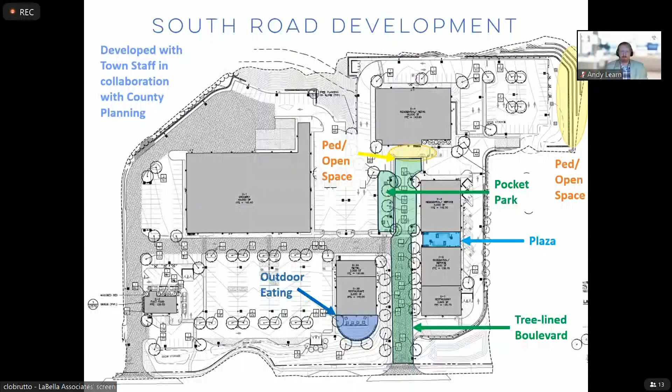Okay, so this just goes through these details. This is the plaza here between these two buildings. There's bike parking, light poles, benches, trash cans, stamped concrete pavers, and planter boxes.

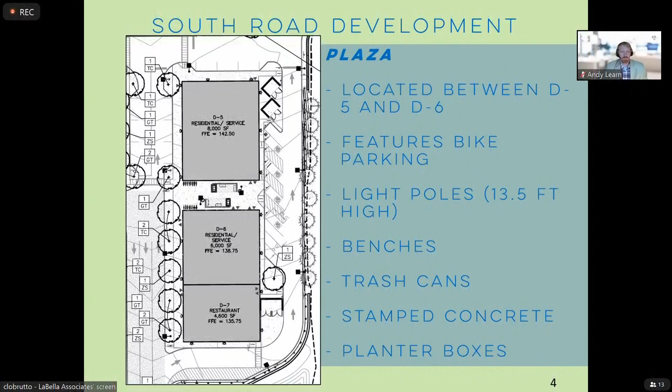Here we have this southeast open area I was talking about. So this is the design as it stands today, but in the future, as part of our upcoming submission, these walls will be reduced to 2-foot seating walls.

I just note that there's snow storage proposed a little bit further north. We'll move these picnic tables that you see so there's not conflict there. And this is located south of D4, which has residences.

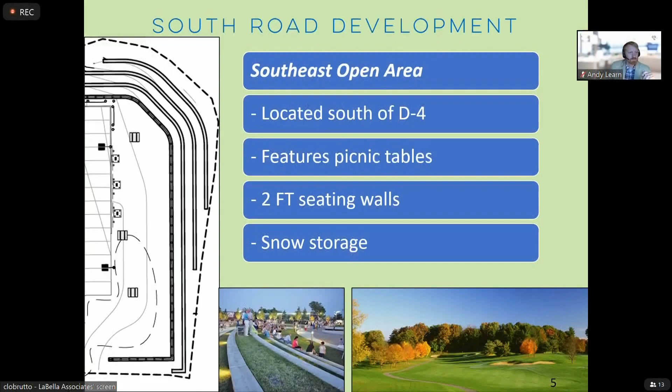Again, we have the outdoor eating area, which is west of D3. This is right off of Route 9, by the tree-lined boulevard. As you enter, it's got tables.

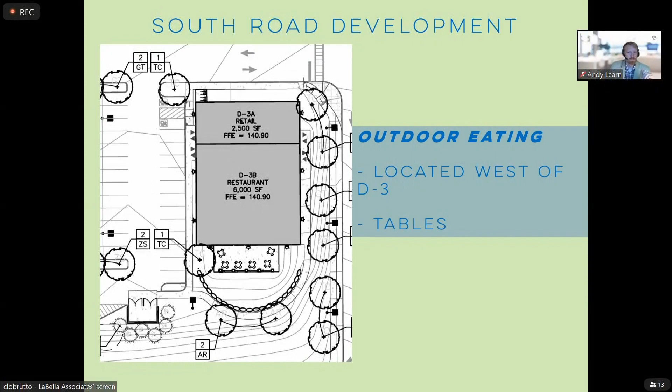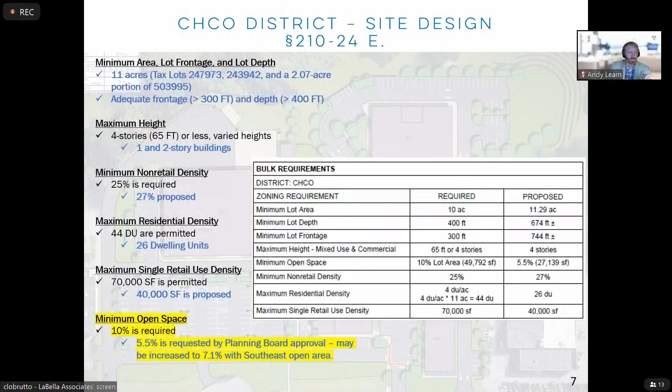One of the things we need to clarify is whether the board has the power to waive the 10% requirement so we can come in with approximately 7.1% once we add on this open area at the southeast corner, or if we actually need an area variance from the Zoning Board of Appeals. That's one thing we'd like confirmation on.

I just thought I'd run through some of the comments we've heard on our application most recently. Lots of questions about the access lanes, and we're joined by our traffic engineer, Phil Greeley from Colliers Engineering, today for specific questions on that. In general, we're still undergoing coordination with DOT, and they will weigh in and direct us.

Pedestrian crosswalk on Route 9, again, that's something DOT has full voice on. We're pending that decision. Snow storage in the Route 9 right-of-way, same story. Possible traffic signal pole relocation, depending on whether there should be 3 access lanes or not.

The refuse enclosure on Route 9, within the site close to Route 9, we know was a question early on. We've presented as part of our recent submission evergreen landscaping and a masonry enclosure. This was discussed at great length amongst town staff, our staff, and county staff, and we've come to the place where we think this is the only place it can work.

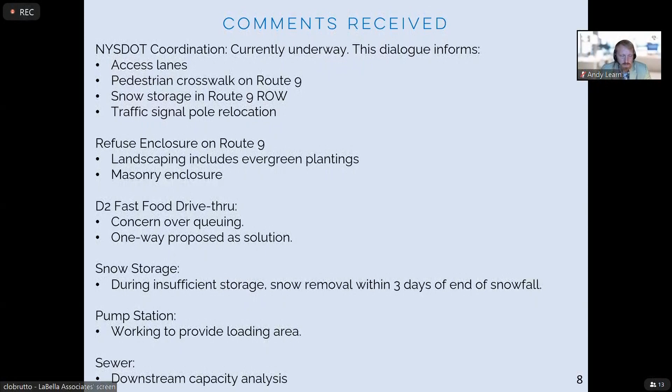We're working to provide a loading area for the pump station. We understand the concerns there, and we're confident we can make that work, perhaps not in exactly the same location, but in a suitable one. And for the sewer, we are getting to work on the downstream capacity analysis. So that's all I have for now.

Okay, thank you for the overview. Quite a few changes have come along. Kristen? Thank you to the applicant for outlining many of the things I was going to get into.

The application is on this evening for a public hearing, SEQRA review for type 1 action, lot line revision review, site plan review, and architectural review. There were a couple of notes related to SEQRA in terms of the blasting management plan.

The applicant has included embedded notes within the plan set. I kept that language there because it can be extensive, and I don't want it to catch the applicant off guard. Although it's acknowledged, I want the applicant to be aware that this is its own lift in terms of workload and will require additional review by town staff, not necessarily planning, but building department, so you may want to start that coordination and consultation.

Also, as was mentioned, DOT consultation is ongoing. That consultation will also include continued conversations with our town traffic consultant, JMC, and planning staff. There are also standard notes for lot line revision review that are still included, as was mentioned, as part of the application process.

There were many comments when we first received this submission and application. We think that the applicant has been responsive. We've been working with the county and the applicant over the last many months to get to the submission as it is proposed currently. That said, we do still have a number of comments to which the applicant has addressed or identified, acknowledged this evening already.

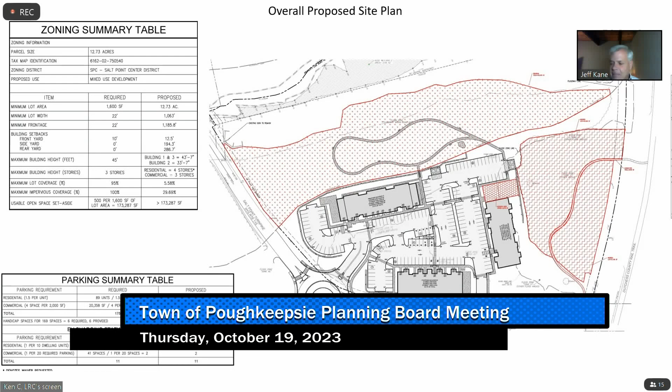But that'll be corrected. The other thing that was particularly called out, and maybe we can get some feedback from the board, is the location of the EV charging. We chose this area in the center of the site, not the prime spots right in front of any one particular building, but tried to make them accessible to all users. I had a long discussion with county planning about that at our meeting, and they came around and understood why we chose those spaces. We're happy to relocate them if it makes sense to the board, but we'd like to spend a couple of minutes talking about where the board thinks those are appropriate if not in this particular location.

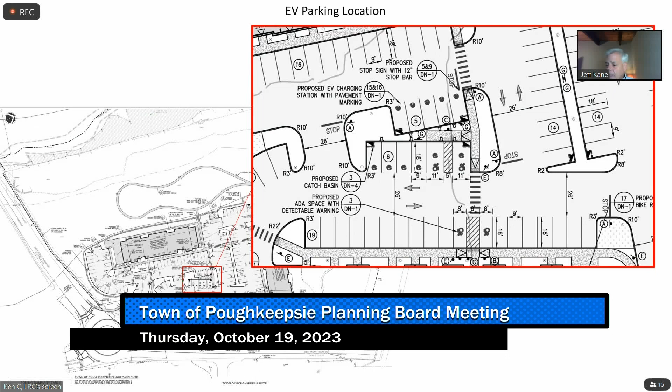All right, I think those are the highlights we wanted to raise and talk about, but we're looking forward to your additional comments as we move forward on this. Great, thanks, Jeff.

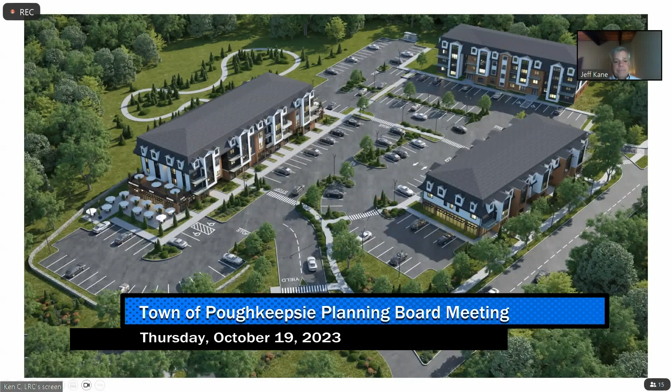Let's go to Eric. This will be the first time this application is up for a public hearing. It was revised back in August of 2022 and circulated for the planning board lead agency, and there's been no objection. So the board is now the lead agency.

I'd agree with Jeff, there's been a lot of progress on many of the elements discussed with staff and with the planning board. He correctly identified some areas that need additional work, but it's a welcome return to discuss where to go from here. As far as the uses, that was one of the central issues we looked at, and I'm glad to hear that'll be clarified moving forward.

That way the consultants can look at it and the board can discuss it further next time. Similarly with EV chargers, the issue was not whether the central location was good or not, but whether it would be a useful discussion if the board was interested in other locations at the site as well, or if that's sufficient where it is.

Another point, since the staff review went to the board, it occurred to me that something got discussed offline but not in public. Under code 2-10-93, open space preservation provides for all applications with a residential component to have a dedication of land for public parkland or a fee in lieu of. I don't recall that we've had that public discussion yet. There was a lot of discussion about private amenities for residents, but not about a dedication to the town of Poughkeepsie for public parkland or a fee.

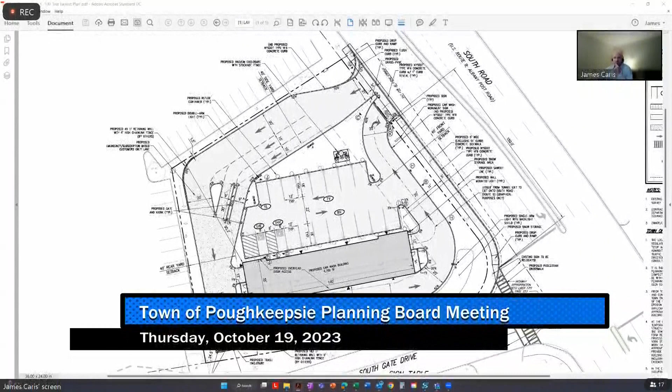The application is still technically on for a public hearing, even though this evening was just a presentation, not a full submission. So we are recommending that the board open the public hearing, hear any comment, adjourn the public hearing, and defer action with comments. As noted, there were several meetings between the applicant and staff. We think this is a step in the right direction, understanding there is still review to be done. Once we've received the traffic study, there may be additional meetings or analysis required, but I know the board shares some concerns about queuing.

There are requirements that will have to be met through DOT as well, because they had requested a traffic study for review. I think the way they changed the plans allows for more queuing on site, because it's less restrictive there—you can be going around the corner.

For the record, the applicant will still be responsible for a written response to comments provided as part of their July 2023 Planning Board review, as well as a full set of revised plans upon their next Planning Board submission. The board should note that the deferral action resolution I included documents this by referring the applicant to said July comments.

To that end, Andy Learn, our town engineer, will not have additional comments at this time, as we did not circulate this to him for any additional review—we wanted the full submission. So this is really just to provide an update, if you have comments based on this interim layout as we move forward. But this layout has come a long way, and we think a lot of those previously existing comments have been addressed.

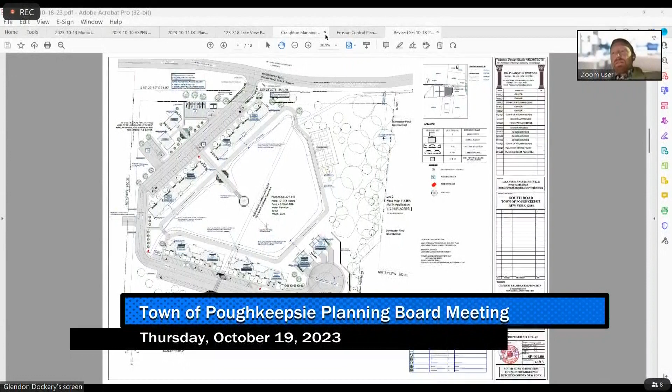Lisa mentioned the access issue. We also have concerns about sewer and water for this site. Those are also privately owned, and they serve multiple lots. So similar to other projects on our agenda this evening, that will require a transportation corporation in order to allow those utilities to be connected.

We mentioned the spillway. Spillway is a concern for me. You've got a road constructed over the existing spillway for the pond, with a fairly significant watershed draining into the area and into the pond. We want to make sure that, first of all, with the drainage analysis, the full watershed is analyzed and accounted for the flows going into and out of the pond. And we want to make sure the capacity of that spillway is maintained, and that the downstream areas of that pond are not impacted by any changes resulting from this development.

We had some concerns about the orientation of some of the roads. Sharp angles shown would be very difficult for some vehicular movements, as well as sight distance issues. I think those are the big issues, along with coordinating with the fire department in terms of the length of the cul-de-sac, to make sure that doesn't exceed any fire code requirements, not to mention town code requirements. I think that's 600 feet if I recall, but we'll have to let the fire department weigh in on that. All right, let me circulate.